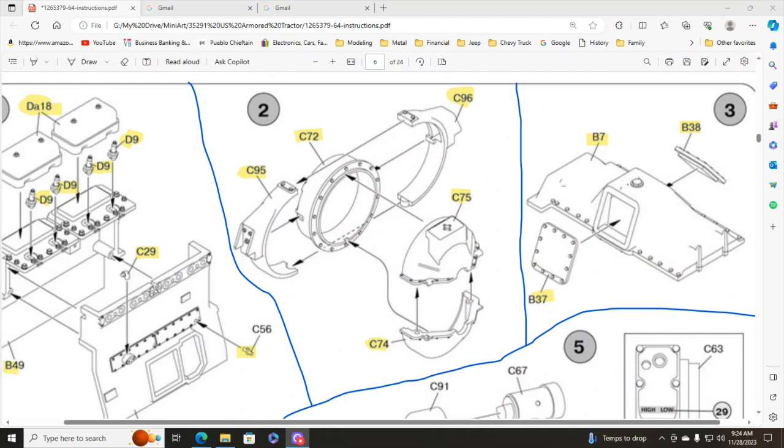Okay, this is the oil pan, and then we've got 2 little access covers to go on each side. Now I noticed an error in the instructions here. According to the instructions, both of those access panels are flat, and that's not exactly the case. Let me show you here.

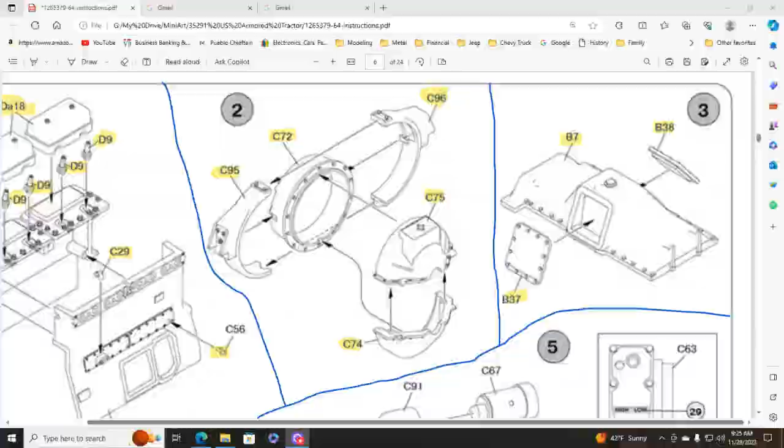Okay, this is B37, and you can see it's got a bump in it, I guess, for a better word, and this is 38. So this goes on one side, this goes on the other. This protrusion here is a good indicator to show you that this goes on this side. Okay, got to make sure we don't mix them up.

Need very little glue. I got too much on there, but it's easy, as long as you don't mess with it, to come back later with a fiberglass pencil and clean it up.

And this one will go over here. I think this is, I started to mark the back so I could tell which one was which. Okay, just like so.

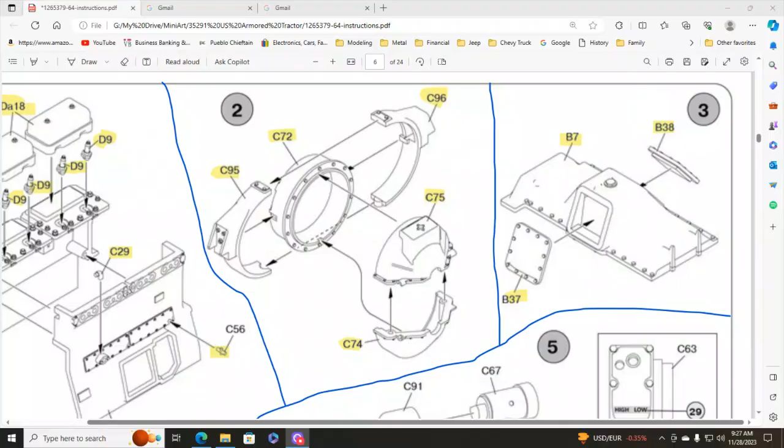Okay, all this stuff here we can change to green, because whatever it's going to fit to has been done.

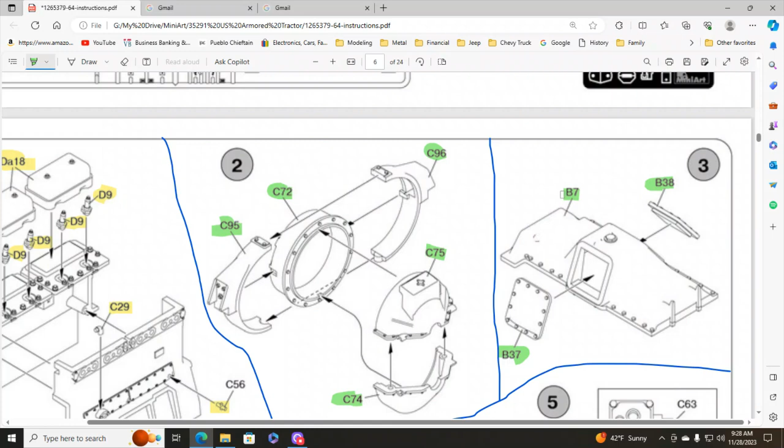Okay, let's go back here. I really like this program for a way to keep track of stuff. I think it's just a Microsoft Edge program.

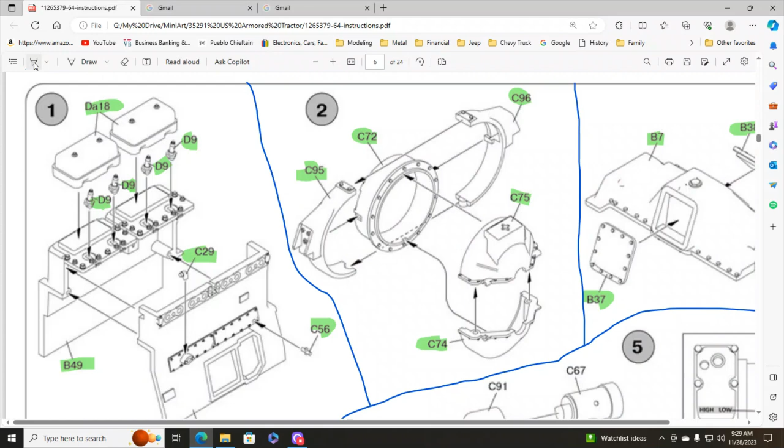Okay, and that will be all right. And if we go to step 4, it's just putting the first 3 parts together. So let's go ahead and do that. Okay, and then it'll probably be good for the day.

Here's one. Got to be real careful with it already. This is the side. Goes like so. Here we go.

Be real careful you don't have your finger over the glue joint, because doing it like this, the glue can capillary through and go right up under your finger and create a mess. Okay, let me just hold that for a second, and then we'll have this.

Okay, and just keeping everything oriented correctly, this will go like this. There's a couple little slots those go into.